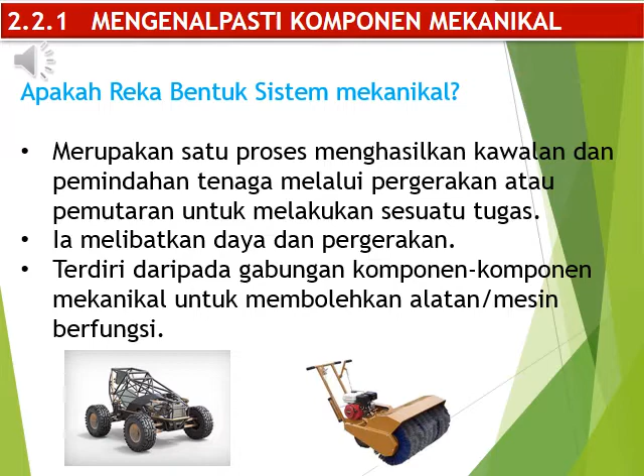Kita boleh lihat gambar di bawah, iaitu contoh kereta kawalan jauh dan juga mesin pembersihan. Ini melibatkan rekabentuk mekanikal.

Terdapat beberapa komponen mekanikal yang akan kita belajar dalam topik ini. Berikut ialah beberapa contoh komponen mekanikal. Yang pertama kita ada gear, aci engkol, gelongsor, pautan, tuil atau tuas, rantai, takal, bindu, galas berbola, tali sawat dan aci sesondol.

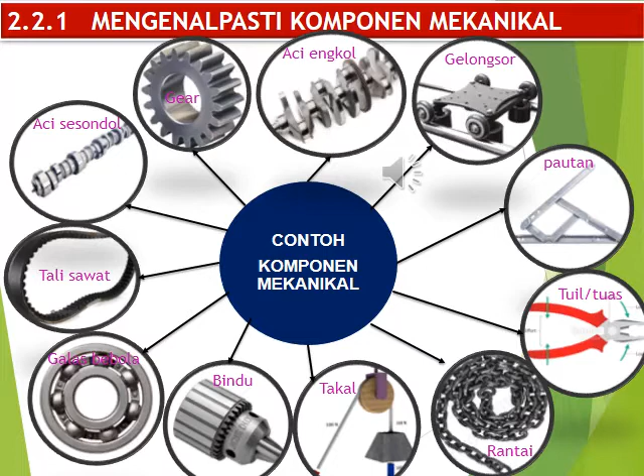Seterusnya, mari kita mengenal pasti komponen mekanikal yang pertama, iaitu gear. Apakah dia fungsi gear? Fungsi gear memindahkan kuasa daripada sumber kepada penerima dan menukar kelajuan sesuatu mesin.

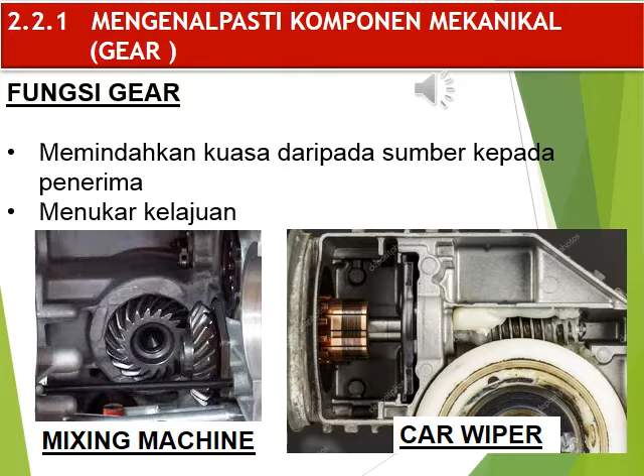Cuba lihat contoh di bawah. Kita ada mixing machine, iaitu mesin pengadun, dan juga car wiper, yang juga dikenali sebagai pengelap cermin kereta. Kedua-duanya menggunakan fungsi gear.

Ini adalah contoh lain yang menggunakan fungsi gear, iaitu kita lihat gambar mesin getah tangan, jam tangan, kotak gear dan juga kereta kawalan jauh. Keempat-empat jenis ini menggunakan fungsi gear.

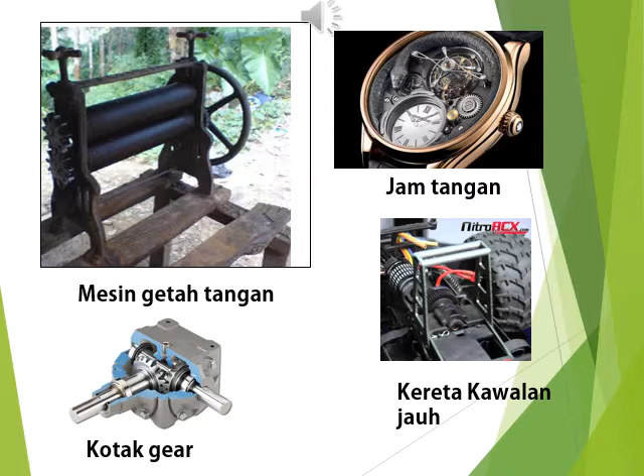Mari kita mengenal pasti pula jenis-jenis gear. Jenis gear yang pertama dikenali sebagai gear serong atau bevel gear. Yang kedua, gear taji atau spur gear. Yang ketiga, gear skru ataupun screw gear. Yang keempat, gear tulang hering ataupun herringbone gear. Yang kelima, gear rak dan pinan ataupun rack and pinion gear.

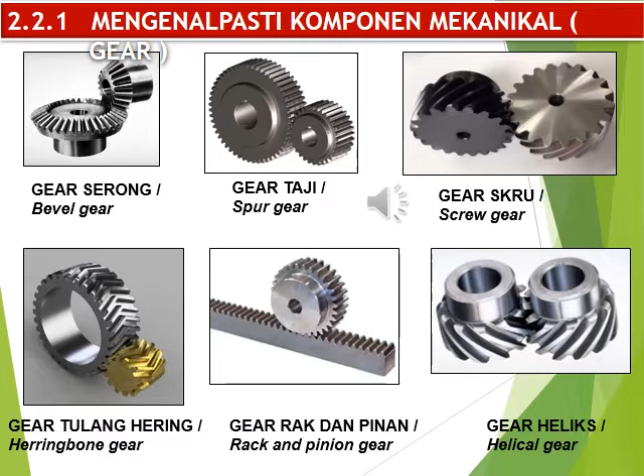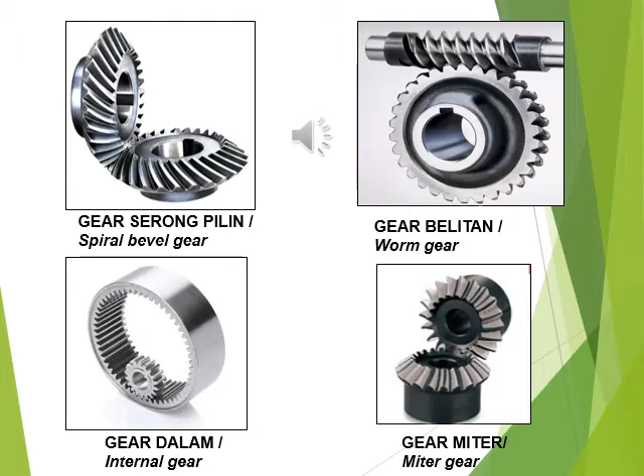Yang keenam, gear heliks atau helical gear. Yang ketujuh, gear serong pilin atau spiral bevel gear. Yang ke-8, gear belitan atau worm gear. Yang ke-9, gear dalam atau internal gear. Dan yang terakhir, gear miter atau miter gear.

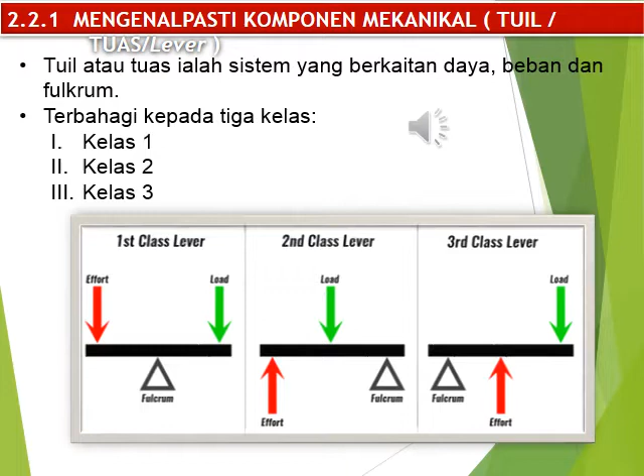Seterusnya, mari kita mengenal pasti komponen mekanikal yang ketiga, iaitu tuil atau tuas. Tuil atau tuas ialah sistem yang berkaitan daya, beban dan fulcrum. Ia terbahagi kepada 3 kelas, kelas pertama, kelas kedua dan kelas ketiga. Mari kita lihat contoh pada rajah 2.2.2, teori yang berkaitan dengan tuas dan antara alatan yang menggunakan tuil dan tuas.

Untuk kelas yang pertama, sangganya berada di tengah-tengah. Dayanya berada di bahagian belakang dan bebannya berada di bahagian hadapan. Sebagai contoh ialah playar. Playar tersebut memerlukan daya di bahagian belakangnya, maksudnya kita memerlukan tenaga ataupun daya untuk memegang playar tersebut.

Contoh yang kedua, kelas kedua, sangganya pula berada di bahagian hadapan, iaitu bahagian tayar kereta sorong. Di bahagian hadapan kereta sorong kita ada tayar, iaitu fulcrumnya, dan bebannya, contoh kita masukkan pasir ke dalam kereta sorong, itu ialah beban, dan dayanya diperlukan apabila kita memegang bahagian pemegang kereta sorong tersebut.

Kelas 3, contohnya ialah stapler. Kalau kita lihat stapler, fulcrumnya berada di bahagian belakang. Kita memerlukan daya atau tenaga di bahagian tengah stapler, dan beban iaitu kertas yang dimasukkan di bahagian hadapan.

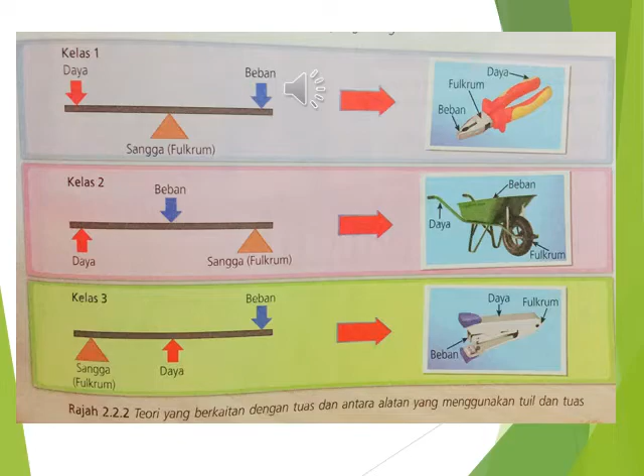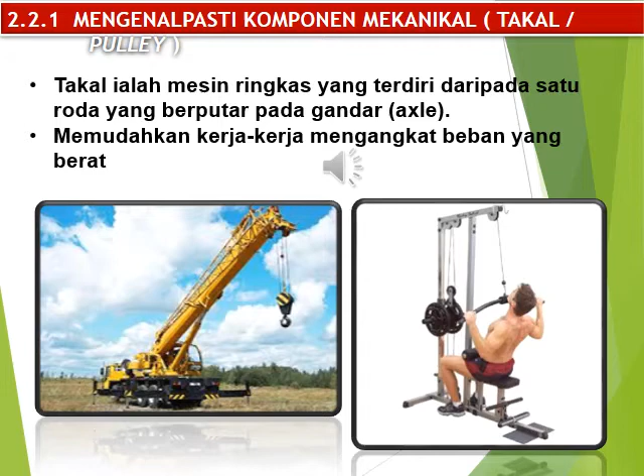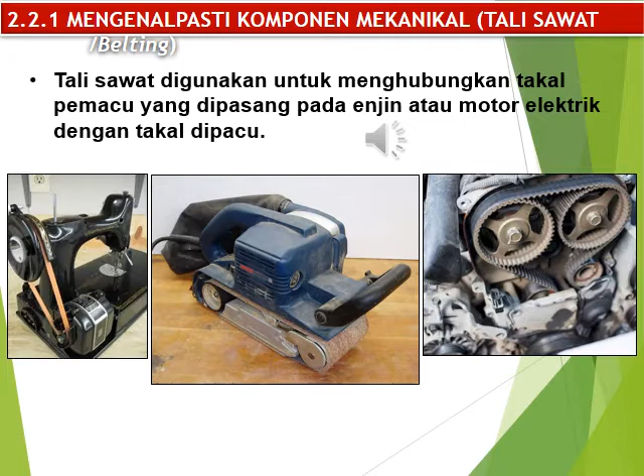Lihat contoh di bawah. Contoh yang pertama, tali sawat digunakan pada mesin jahit. Yang kedua, sander, dan yang ketiga, enjin kenderaan.

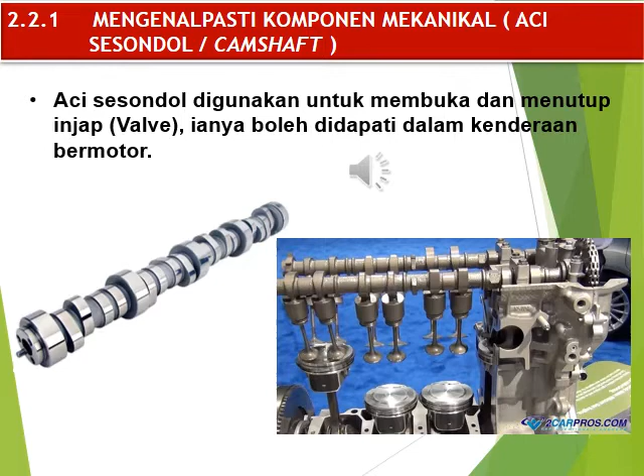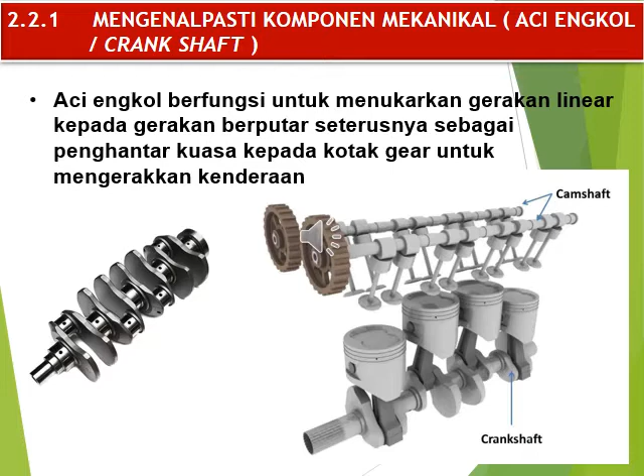Aci engkol berfungsi untuk menukarkan gerakan linear kepada gerakan berputar, seterusnya sebagai penghantar kuasa kepada kotak gear untuk menggerakkan kenderaan. Lihat gambar di bawah, itu adalah contoh camshaft dan crankshaft. Kita boleh lihat bentuk ataupun perbezaan antara camshaft dan crankshaft. Bagaimanakah aci engkol dan aci sesondol berfungsi? Mari kita lihat video selepas ini.

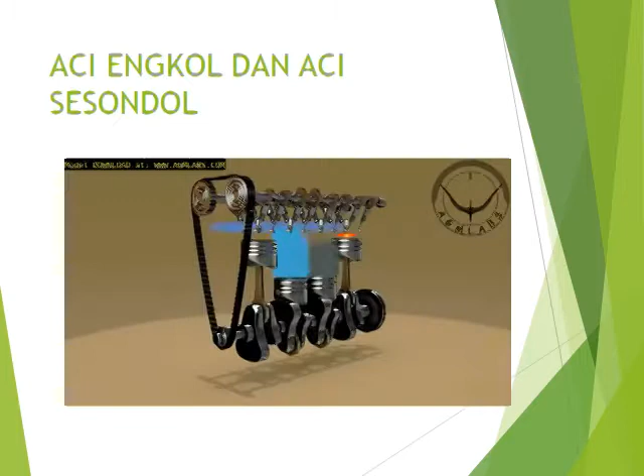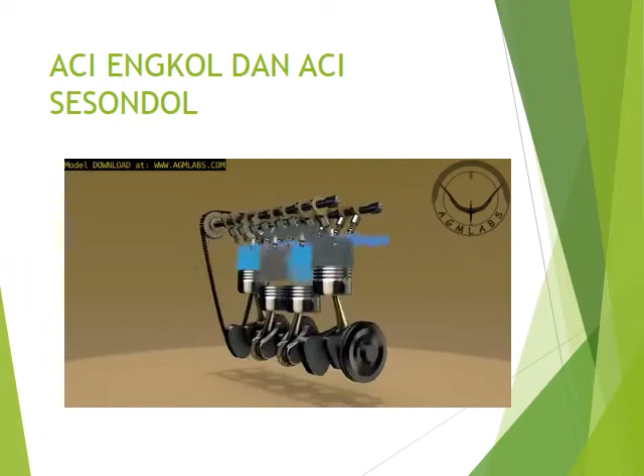Today, the internal combustion engine is used in motorcycles, automobiles, boats, trucks, aircraft, ships, heavy-duty machinery and power generators. A four-stroke engine is an internal combustion engine in which the piston completes four separate strokes: intake, compression, power, and exhaust during two separate revolutions of the engine's crankshaft, and one single thermodynamic cycle.

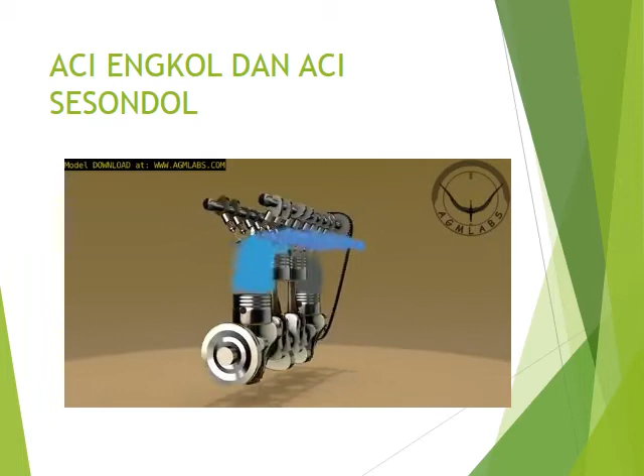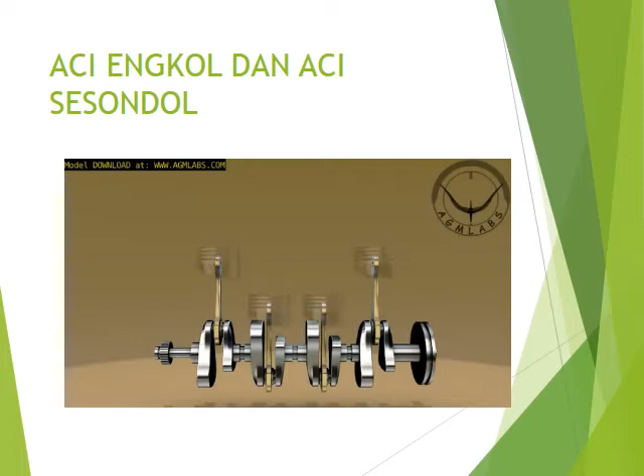Let's take a look at the basic internal parts of a four-stroke engine. Inside the engine block, there is a crankshaft. Piston rods are attached to the crankshaft, and pistons are attached to the piston rods. As the crankshaft turns, it causes the piston rods to make each piston move up and down.

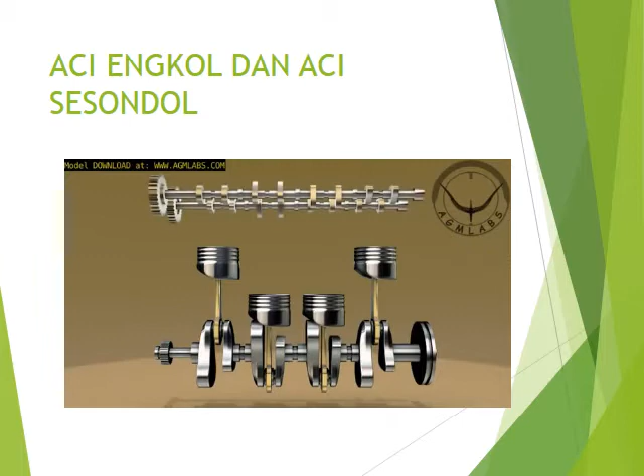At the top of the crankshaft there is a camshaft which is connected to the crankshaft by a timing belt. While the crankshaft is making the pistons move up and down, the camshaft is turning, making the valves open and close.

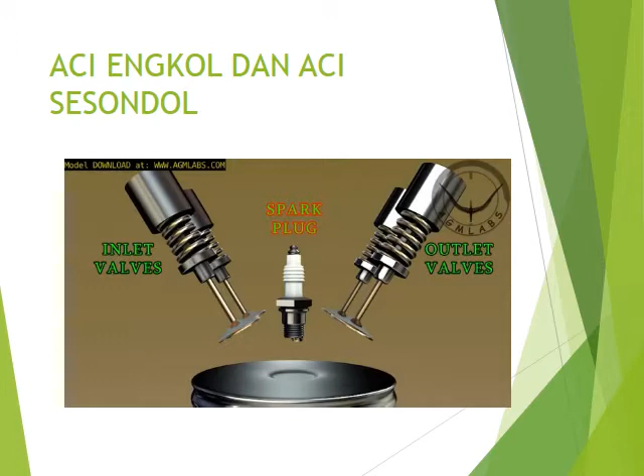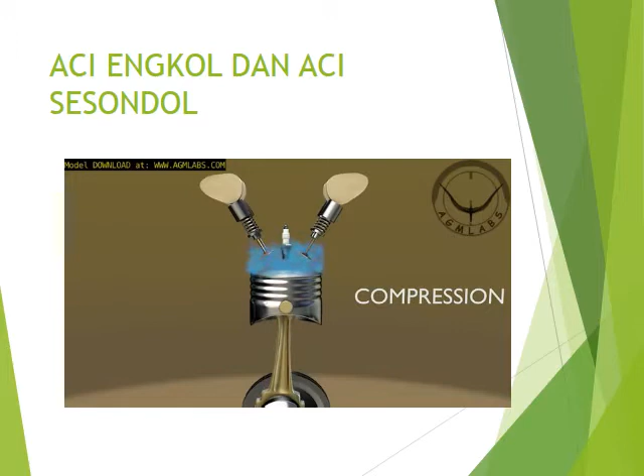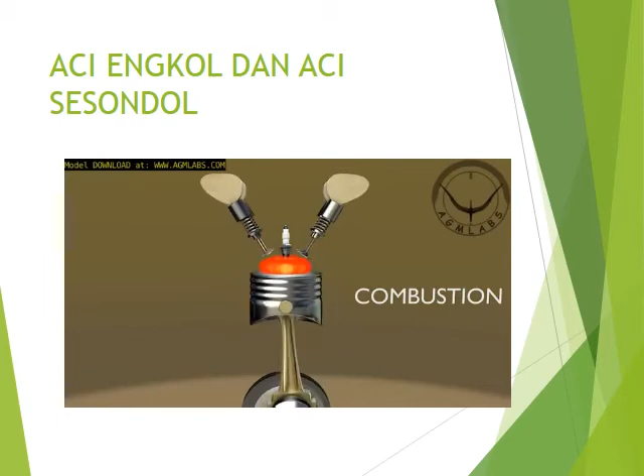Let's now take a look at how combustion creates the piston's motion. First, intake stroke: the inlet valve is opened, and the fuel-air mixture is drawn in as the piston travels down. Second, compression stroke: the inlet valve is closed, and the piston travels back up the cylinder, compressing the fuel-air mixture. Just before the piston reaches the top of its compression stroke, a spark plug emits a spark to combust the fuel-air mixture. Third, combustion stroke: the piston is now forced down by the pressure wave of the combustion of the fuel-air mixture. The engine's power is derived from this cycle.

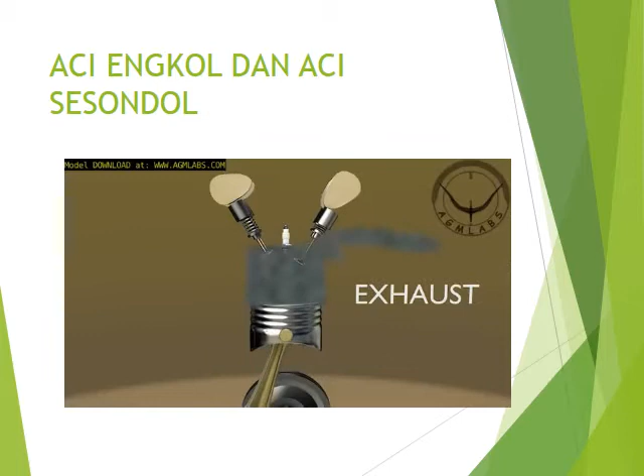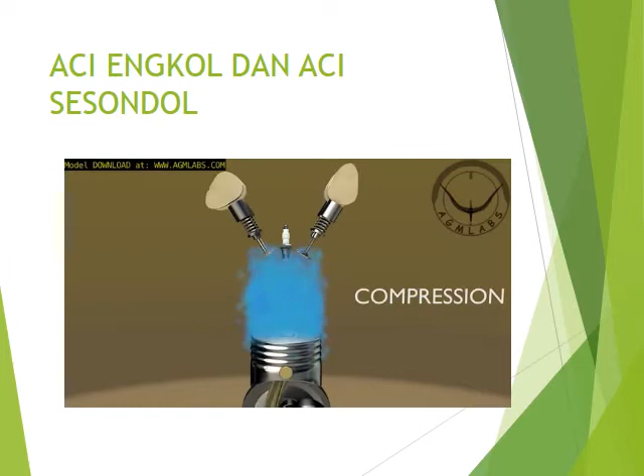Fourth, exhaust stroke: the exhaust valve is opened, and the piston travels back up, expelling the exhaust gases through the exhaust valve. At the top of the stroke, the exhaust valve is closed. This process is repeated. What had been presented is the cycle of operation of one cylinder of a 4-stroke engine. Generally, engines have 2 or more cylinders acting in concert with each other to produce the engine power.